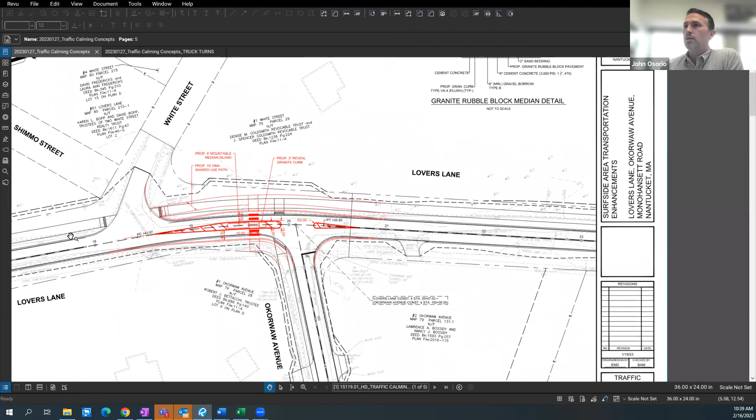The first location is the intersection of Lovers Lane and Okorwaw. What we're proposing here is 10-foot lanes with a raised, mountable median island. Lovers Lane runs left to right, north and south, with a side path on the west side. As you cross White Street approaching Okorwaw Ave, we're proposing a crossing across Lovers Lane connecting to the Okorwaw Ave side path on the south side of the road. We're proposing a raised median to slow down traffic at this location.

Part of the concern is also vehicle movements. We're anticipating that larger vehicles will need to make turns from Okorwaw Ave to Lovers Lane or back and forth as they travel to the airport. For that reason, we are proposing a mountable raised island.

At the moment we're showing a vertical curb with a 3-inch reveal, although we have different options for the type of curbing. In the past for a mountable island, we've used what you may see a lot on a roundabout, called a T100 curb - a slanted granite curb that can be used at this location as well.

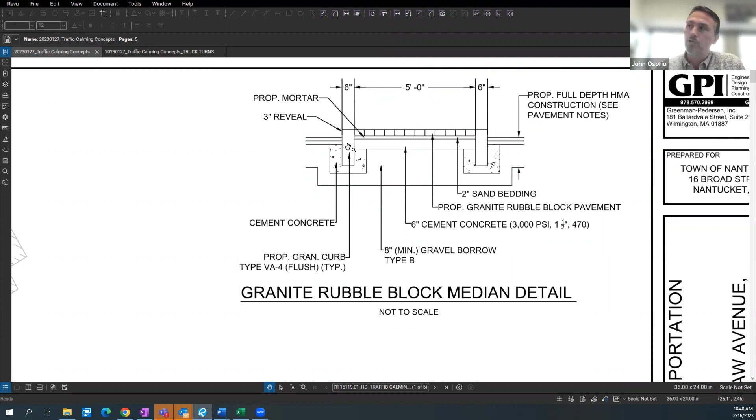What we're really trying to avoid is what we often see around islands used as flush curbing, but for traffic calming purposes we don't think that would be the best approach to slow vehicles down. So the purpose here is traffic calming while also accommodating vehicle turns. We're still evaluating whether that would be a vertical curb with a low reveal, two to three inches, or a slanted granite curb.

The surface of the median, we're proposing cobble, as we've seen in other areas around the island. We're talking Belgian block. We did this on Milestone Road at Monomoy and at Tom Nevers, however those are flush, and again for traffic calming purposes we feel it would be best to have something raised.

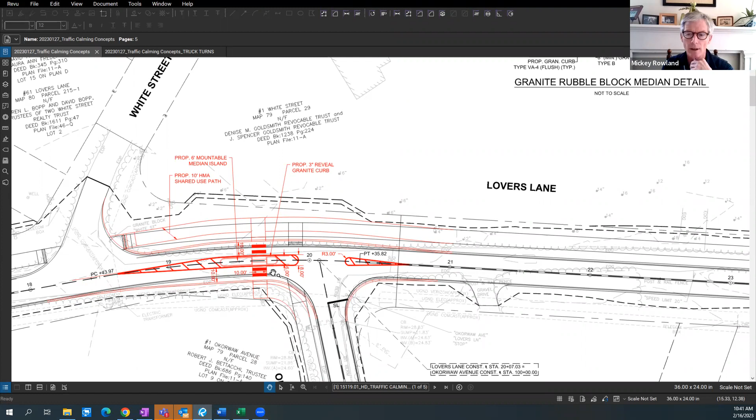Can I ask a question? You have a crosswalk going through the median - will the crosswalk be the Belgian block material? The median island will be Belgian block, but the crosswalk is just pavement, not Belgian block, for wheelchair ADA issues. Perfect, thank you.

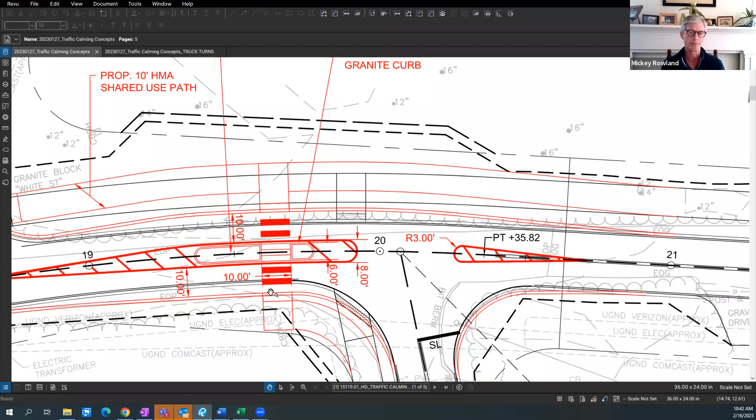Any other questions on this location? I guess I would just like to understand - there are speed concerns at a lot of locations. What is the driver of this? Are we sure this is needed? This seems like a fairly unusual arrangement for intersections on Nantucket, especially at a T intersection. So is it really needed is one question.

And the other is, if it is going to go forward, certainly the T100. I think if you go with a vertical curb there with the turning movements, you're going to end up with blowouts. I think you'd really have a problem with a vertical, sharp edge on that. But I'm still at the point of also, like I say, it's fairly unusual.

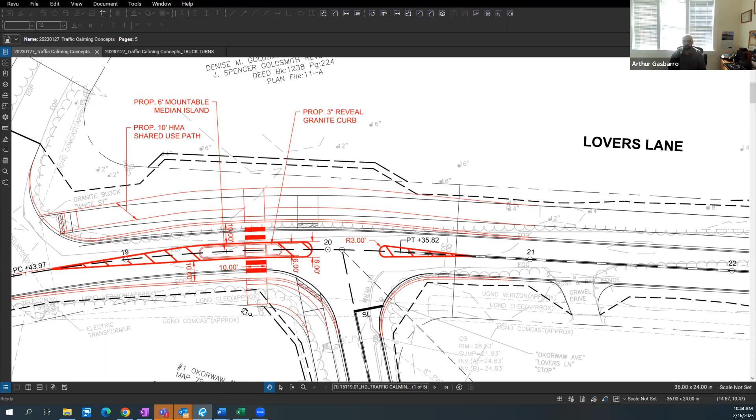Okay, well, keep going, and then I guess the question is, when you have that long of a stretch of a straight road, is this going to really, at the intersection, make a significant difference, and create a bit of an unusual layout and situation, but I'm not necessarily opposed. I just wanted to make sure I understand when we run through the rest of them.

Art: Yeah, I just want to make one note too, that I've been part of the group that's been reviewing these on a weekly basis. I had raised concerns about a straight curb, also with the super sharp curbing. So I've supplied GPI with the specs of the curbing that we're using for the Surfside sewer force main, which has a bit of a rounding edge on the curb, so it's not so sharp and causing blowouts.

We've also discussed that this is a route for house moves, and that island, while it's supposed to be slowing people down, will probably need to be mounted during house moves. I actually was the one who suggested the slanted curbing, similar to what we have in the triangles, like at the Sparks Ave roundabout. So we're looking at different things.

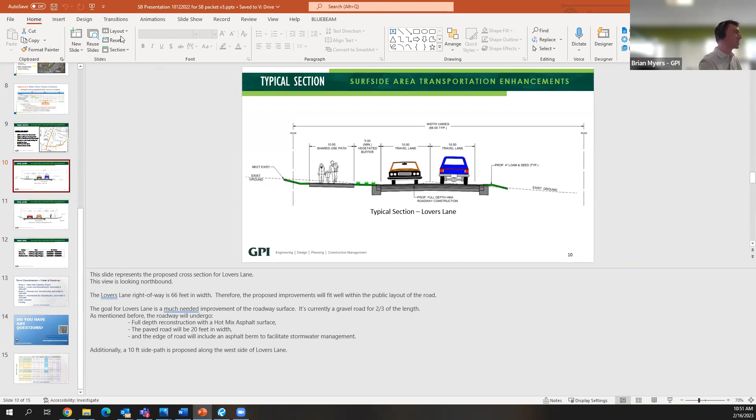What are you seeing, do you have any questions? Okay, looks like maybe we want to look at number 10. Yeah, so it's this one right here. Here, let me pull it up. Okay, so you have it in there, that's the one, go.

So I saw that on that, but you don't have it on your actual plans yet. We do. It's just that the plan I had displayed is really just the traffic calming plans. We don't have the whole setup, but we can certainly bring up the whole set and I'll do that. I just want to make sure, because I thought the discussion at the select board level wasn't quite clear. I felt like there were changes being made on the fly a little bit, and if this is what you're going to build, I'll stop there.

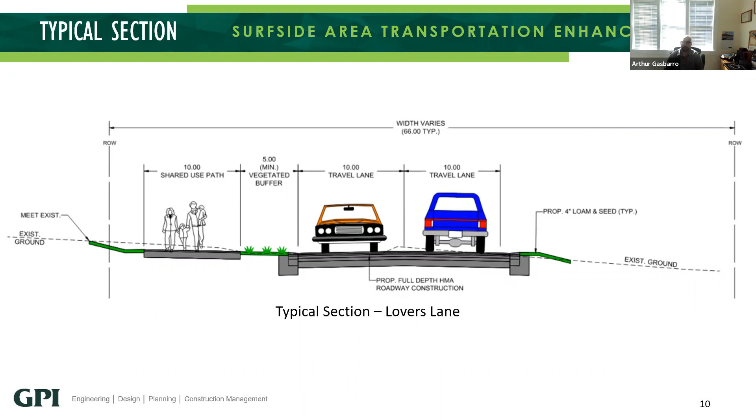I think we're on the same page. As long as that's in fact the case, a gutter to gutter 20-foot width, I think will be less than ideal from some respects, but balancing out other concerns, I can understand that. So, thank you. If you want to move on to the traffic calming, that would be great. Sure.

And if you want to see the full set of plans, we can certainly provide those to you. I'll look on the next set. That's fine, if you guys are working on it, we're good. Okay.

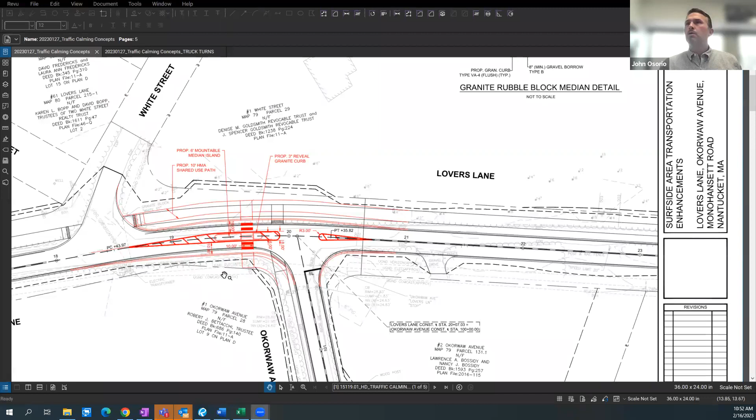All right, you should be seeing traffic calming back up. Yeah, we're still at Okorwaw. Okorwaw and Lovers, yeah. So we're switching over now to Lovers Lane at Rugged Road. What we're proposing at this location is really a raised intersection or a raised table, there's different terminology for it. I'm not sure if there's a location on the island for a full raised intersection. I believe you do have a raised crosswalk at one location I've seen on the island, or speed humps, which are completely different than this. Yeah, we have tables at the school. Okay.

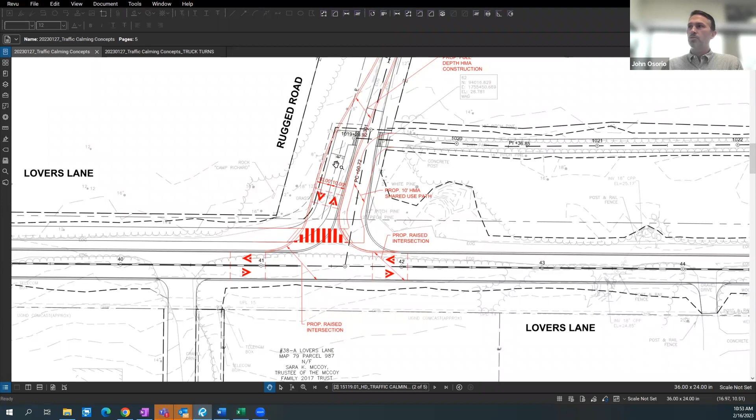So this is ramping up to about a 4 to 6 inch raised intersection. The whole intersection would be raised, including the crossing of the path along Lovers Lane. Once you get into Rugged Road, it dips right back down to existing grade, and then we tie back into a gravel road along Rugged Road. Rugged Road is a complete gravel road, it's a private road. It connects over to the Camp Richards driveway, and then I believe it continues further west.

I don't know that I'd call that a gravel road. That's what they call dirt roads. Dirt road, it's a dirt road. I know, but they call them gravel roads. It's fine.

Getting back to the plans, that was one form of traffic calming, pretty much at the center of Lover's Lane, cutting it in half there, between distances between Boulevard and Old South Road.

Is the surface going to remain asphalt, or will that change to a different paving material? The recommendation would be ideally to have a different material so that you can really see this, so that once the striping goes away, vehicles won't approach too fast. Ideally, we lock this in with a different material - that could be brick, Belgian block, locked in maybe with some flush granite. The ramp up is certainly asphalt, and then there is striping and signage associated with the raised intersection.

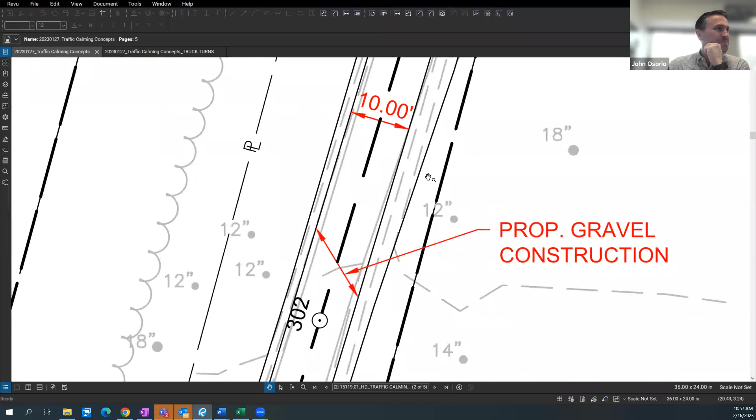I get that's probably beyond the scope of what you're doing, in terms of that rutted out section of Rugged Road - it's maybe 11 feet wide, or so, right? Right in close to there. Ten. And you can see from your contours that it's sunk in 2 feet, right? So it's not an area that vehicles can pull off to the side to let someone else pass and repass.

On that basis, going back to the Camp Richard entrance, one vehicle's got to pull over at the beginning and wait for the other to go. The way you're shifting this, I don't think that's going to work very well - people aren't going to see it, I think it's going to create issues, and there's an awful lot of traffic on that one section at certain times, right? I get that Rugged's not a heavily trafficked road, but the camp sees a lot of use, and there's drop off and pickup times for the scout meetings, with people coming and going at the same time.

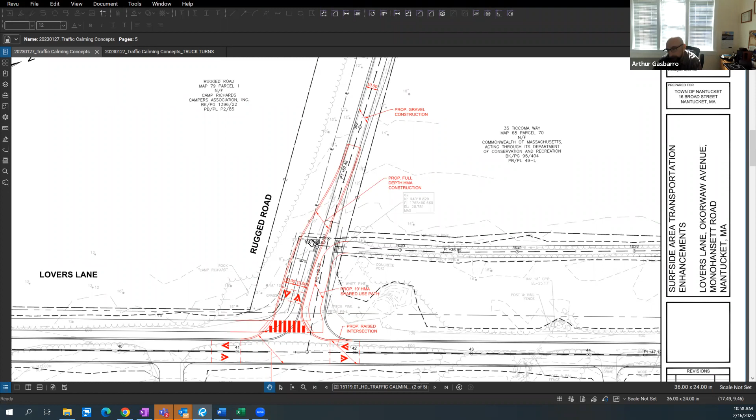I think that if you could find a way, given that you're already talking to the state forest for the easement for the path, to move the path over as well and have the easement come down along that line, you could straighten that intersection out, right? I think you'd have a much better design, and it would function better - the way you have this kind of angled right now, if you were to bring that in more at a 90-degree angle and shift the whole thing over, I think it would be safer and function much better.

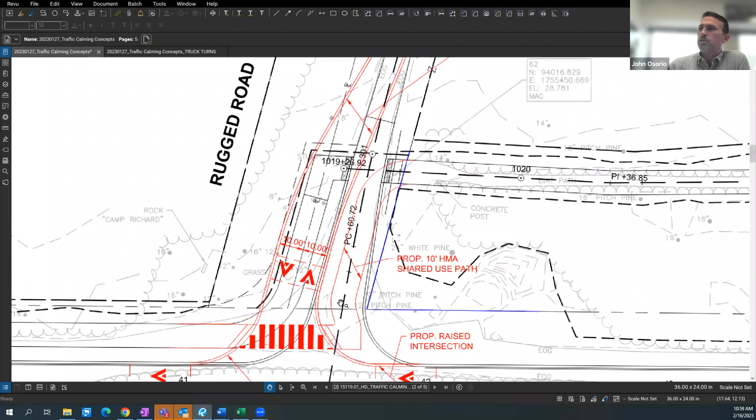Did you follow sort of what I was explaining? I think so - Rugged Road today is basically here, a straight line right here, along the baseline. And you're asking if we could follow that alignment a little bit better, or follow that alignment pretty much.

Right, I think it would work much better if you were to do that, and also where you increase your improvements to 20 feet wide, which I think is great and needed for that very reason. But if you were able to straighten that out a bit, so you had less of an acute angle at the intersection with Lover's Lane, and it was squared up better, I think people would be less likely to - it would slow them down.

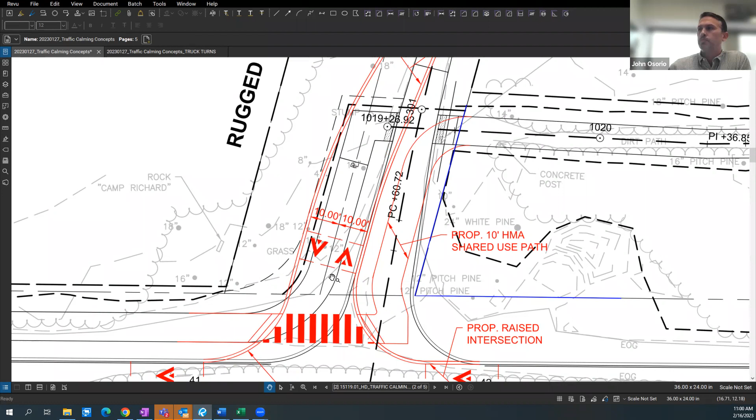So just a couple of things to note: we are a bit restricted. Right now the Rugged Road dirt road is basically hugging the right side of the layout, and it's a private layout. We have DCR to the north and Camp Richards to the south.

The struggle we were having is we need to fit the side path along Lover's Lane. At this intersection it takes a turn up Rugged Road and continues through the state forest. There's an existing dirt path through the state forest we're looking to improve as a paved path all the way through. So the side path will no longer continue along Lover's Lane, it will continue through the state forest. To accommodate that, we needed to pull this side path outside of DCR property.

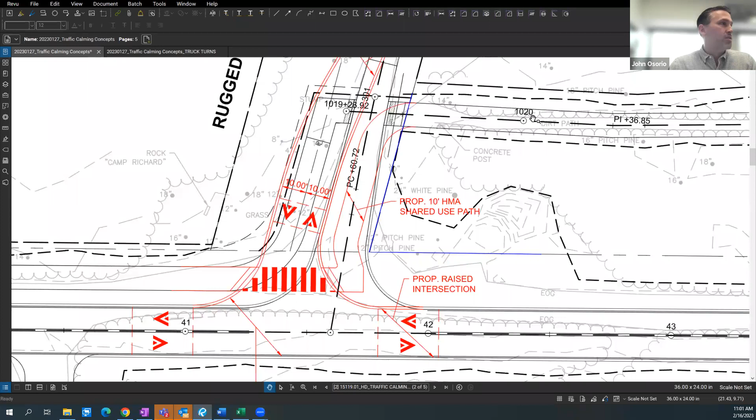We can't have any easements off of DCR property. It's an Article 97 protected resource, which they would not allow an easement for. Now what they are allowing, with a re-enhancement of an existing trail, is they've come to an agreement with the town on maintenance of that specific trail. So they wouldn't allow a new trail, but they would allow enhancement of an existing one. That's the reason why this is somewhat shifted, and then we have to tie back in.

Just to give you a little bit of an idea. No, I understand, you've answered my question. I can see the distinction. I'm familiar with the trail.

I was curious as to, on that same basis, if that shared use path along Rugged could run on to the DCR land, but I understand Article 97 restrictions and the distinction that's probably in play.

So I guess the other question would be to cross Rugged straight across and then put the crossing there off of the intersection. I could see where that's got its pros and cons, in terms of, probably from a safety perspective, it's better to have it at the intersection, but maybe not in this particular case. I guess we should just talk about that a little bit.

What if you were to have that crossing where the path is right now? It looks like that's how you maybe had it drafted before. Yeah, you see the dark red line is our original concept.

I'll backtrack a little bit here to give you more info on where we were. We actually didn't learn that Rugged Road was a private road till recently — I think Erica pointed that out to us. Thank you, Erica. And with the knowledge of that being a private road, potentially requiring more of an easement if we're going to push the path up Rugged Road...

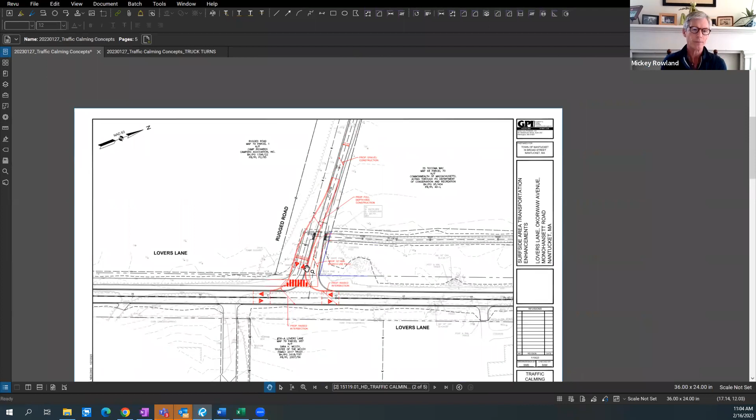With the two-way traffic that has to be accommodated up in there, versus if you flip-flop it back to how you had it. And who knows, maybe there's an aspect of this where the town considers a taking of just 80 feet, or maybe 100 feet, of the very end of that Rugged Road layout. It could probably be a friendly type of taking, abutting Camp Richards and DCR. I think for the scope of what we're proposing and the long-term improvements, it's better to get this intersection as ideal as possible.

Not because of a potential easement or maintenance issue for a very short stretch of road. That said, there was some recent agreement between Camp Richards and the town, and the only plan that they have seen is the dark line.

So our previous plan, I think you might be on that dark line plan, pull that bike path a little further to perhaps consider just a bit further to the south, and still straighten that intersection and give yourself the ability to bring that intersection more at a 90-degree angle, then switch back. Because right now, when you're angled like that, it's just going to make people tend to go a little faster around the corner in that one direction, sort of an on ramp.

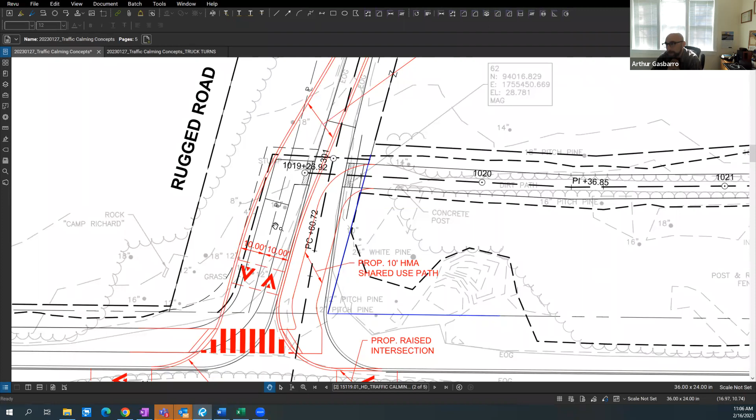Anyway, in terms of what you're showing us for the raised intersection concept, I'm fully supportive. Just want to open it up to the whole work group, but I think this intersection should be revisited in terms of alignment.

If I could just ask, your thoughts on this. Typically, what we would want to see is the crossing within the raised intersection. Why is that? Vehicles are going slower, they're already cautious because it's a raised intersection, so now they're slowing down for any pedestrians crossing.

If we move the crossing further west, we may want to rethink that and really concentrate on just the raised intersection right at the immediate intersection, and not so much at the bike crossing. Now that takes into effect, we have to factor in the safety of crossing 100 feet away from the intersection and how we handle that. Now, it's just a dirt road and there isn't a lot of traffic, so maybe there isn't that much of a concern, but I just want to point all that out so we think that through.

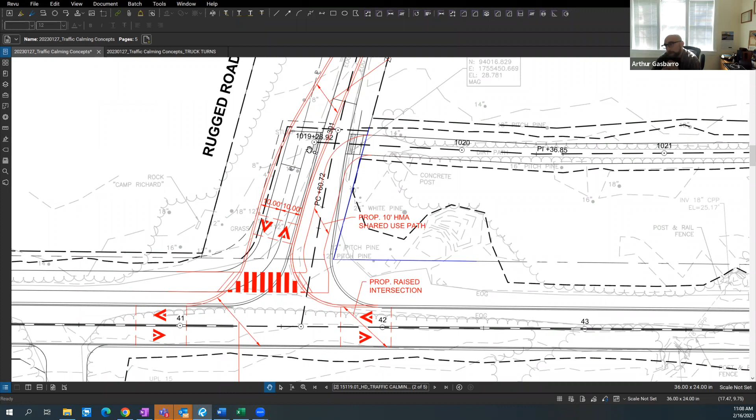I agree with you there. I think you would put the raised portions, limit that to the road, and make sure there's good sight lines and distances where that crossing is further back as the road narrows. That's your traffic calming and safety aspect at that location, because it's where you're going to start to throat down that road to meet the dirt road, gravel road, if you want.

And this crossing right now, as was shown previously, is really one lane. We would want to consider that. Yeah, I think you probably would be widening it out, but if you straighten that out, it's sort of right where it probably would be, throating down, reducing in width from your 2-lane to your 1-lane, which in of itself I think creates the narrowing, would likely create a safer point of crossing.

Yeah. So, thanks. Anybody else have anything they wanted to add on this? Okay, why don't we move on? So you want to see us revisit this crossing?

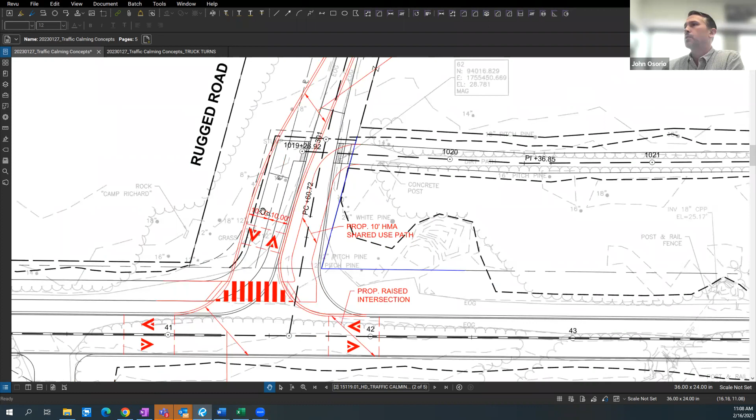Yeah, again, that's just my input as one. We're not, I don't know that we want to, unless you want us to take a vote. I take it that this is still, you said, 25% design, so I hope that there's room for adjustments based on our input. Obviously, we're just an advisory group to the town manager. I can't give you any direction in terms of that, because that's my suggestion. That's certainly not what you have to do.

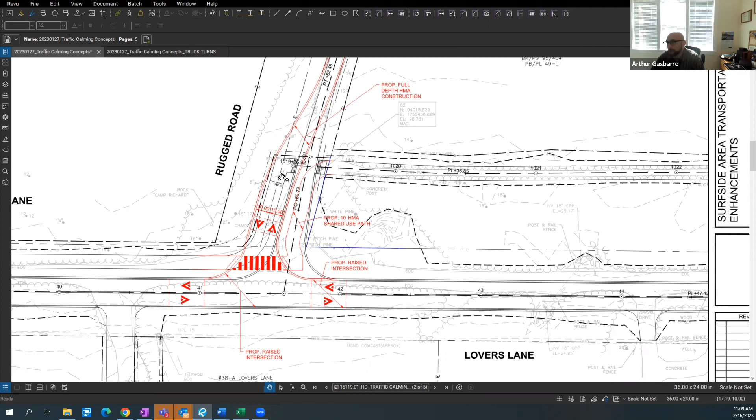I would just hope you took that under advisement. Those are sort of comments, I think, in terms of what you might end up with. I'm hoping to head off, obviously, a situation of post-construction where this isn't working as well as it could, and why did it get built that way.

Right, and just to give everybody where we are on the project, we are actually moving to final design, so at some point we will need direction on which way we move forward. We already have the two concepts, the original, but this is new. I don't think this is new. The red line is the new idea for this location versus the 25% design that's underneath.

Yeah, so looking at this a little more carefully, the advantage that I see to this design, and I hadn't thought of it earlier, is that people coming down the bike path from the right side of your screen, the north, might just tend to fly across the rugged road intersection without stopping.

Whereas the new design forces them to take the curve exactly and then cross, it's kind of a zigzag. I agreed with Art earlier, and I liked the intersection as you drew it in black, but I see a bit of a safety concern for bikers not flying through across that street, forcing the curve. So there's two ways of looking at it.

That was a bit of our concern as well, Mickey. Coming from the south, they are crossing at a raised location, so vehicles are a little more cautious there and have slowed down, and we're only talking about Rugged Road. But still, that's a concern all over the island, right? There are concerns about folks crossing these intersecting roads.

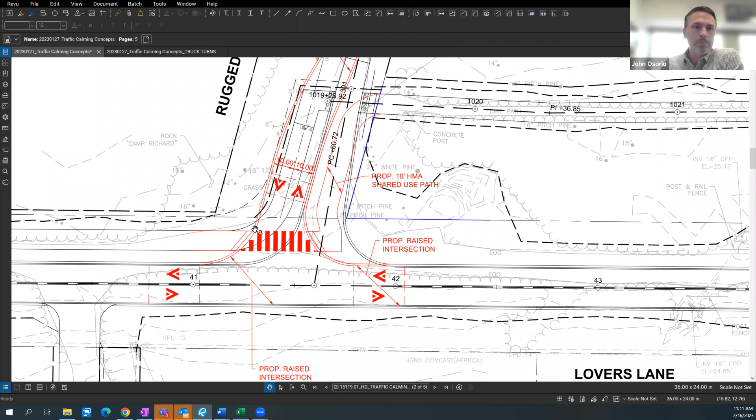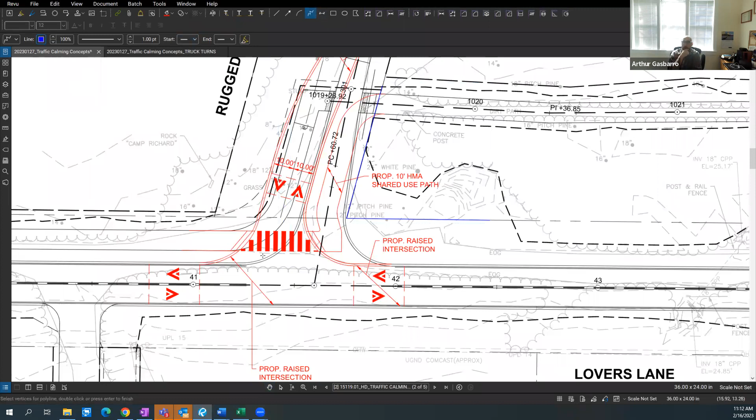I guess I'd offer, if you're going to stay with this layout, I still think it probably should change, but if you are going to stick with it, I'd suggest trying a bit of a rotation for the first 80 feet or so, so it's more like that. Then maybe you lengthen the improvements a bit further into Rugged to create an S-turn to connect back into what's there. If you decrease that acute angle, it's going to be something more like that, and maybe it has to carry on a little further.

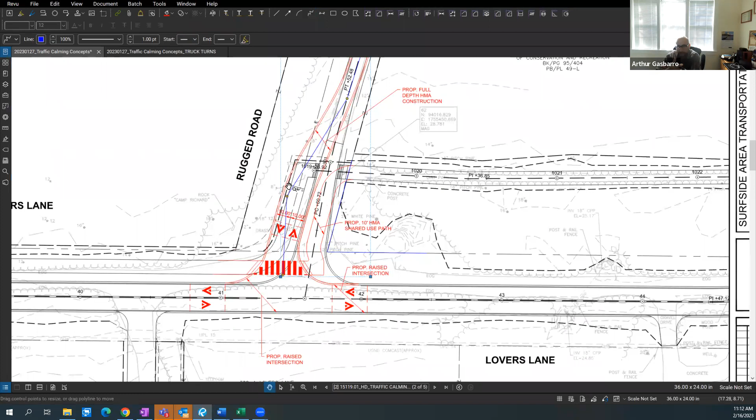You might want to carry that 90 degree to where the crossing is going to happen. My recommendation would be what we've already discussed, but if you're going to stick to this, I think it might be better to look at that a little closer. Okay, any other thoughts?

Okay, why don't we move on to the next one? Next location is right before Nancy Ann. Again, we've heard concerns about speeding, and we've also heard that between Rugged Road and Old South Road we weren't originally providing anything for traffic calming. So we identified the intersection, or the vicinity of Nancy Ann Lane, as a potential location.

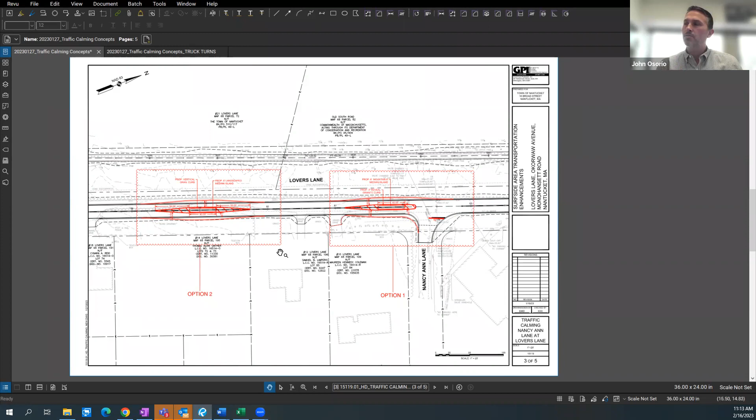We provided two options here. One is very similar to Lover's Lane at Okorwaw - a raised mountable median. The difference is there's no crosswalk in between. Again, the purpose is slowing vehicles down as they're entering a more neighborhood setting. We need to make it mountable in case there are heavy vehicles, larger vehicles taking the left. But the other option, to avoid that odd layout you mentioned for Okorwaw, is to just shift it further down.

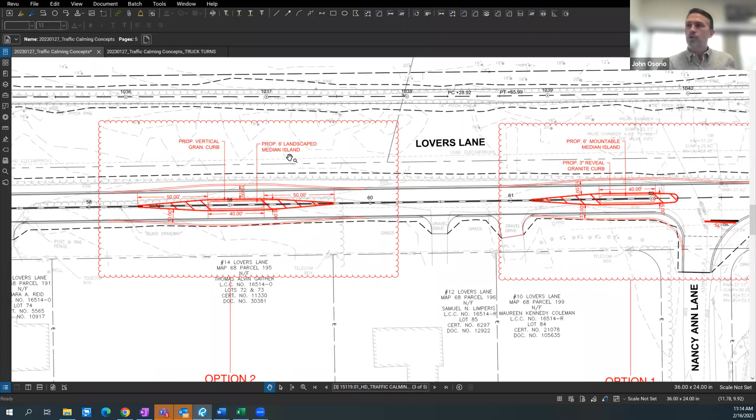We're not too concerned about this. It would be a full raised 6-inch reveal vertical curb. It could be a grass median - it doesn't need to be Belgian block. Or plantings, doesn't have to be grass either. Again, the purpose is having a vertical element in the middle of the road, slowing vehicles down as they're entering the neighborhood, between Rugged Road and Nancy Ann or Old South Road.

The two options at this location - one, we have to consider vehicles mounting, and we'd probably use the same curb material, maybe the T100, which I believe is a 3 or 4 inch reveal but a sloped curb. I guess from a consultant's perspective, would you recommend option 1 or 2?

Well, for ease of not dealing with having to mount it, we would go with option 2. It would create a bit of a gateway into a neighborhood - this is all commercial, industrial over here, and then once you get past Nancy Ann it's residential and state forest. I can see that.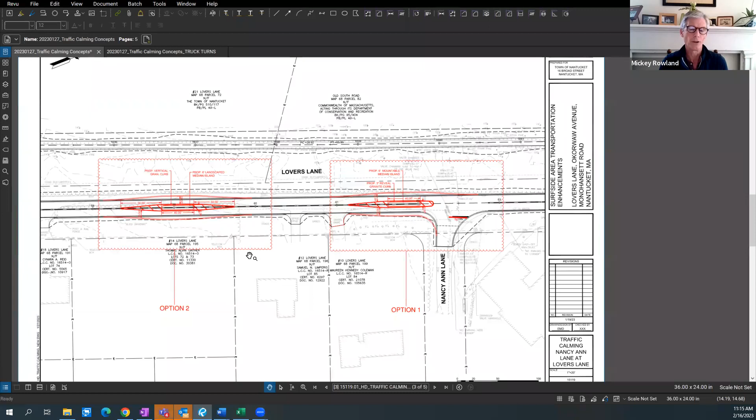Anybody else have thoughts? Option 2 has a vertical curb edge to it - we can go 4 to 6 inch, and it could be landscaped. The curb concerns me a little, if it could be more rounded rather than a sharp edged curb. We can go with a sloped edging curb, which is what Erika had recommended.

You see that on the Sparks Ave split islands, the outside of the roundabout. That would be my recommendation as well. I think the vertical in the middle of the road is trouble. Me too.

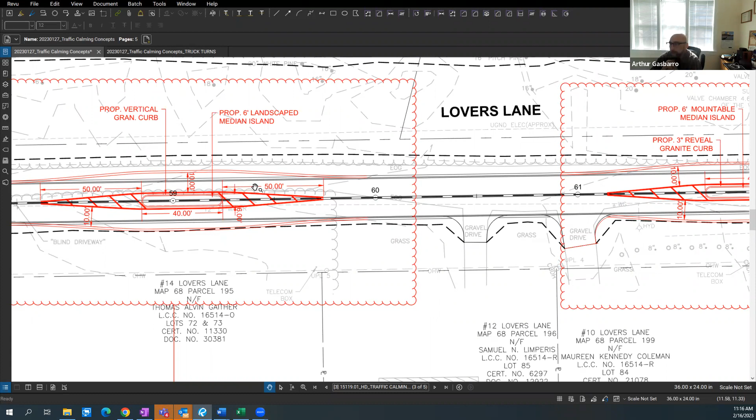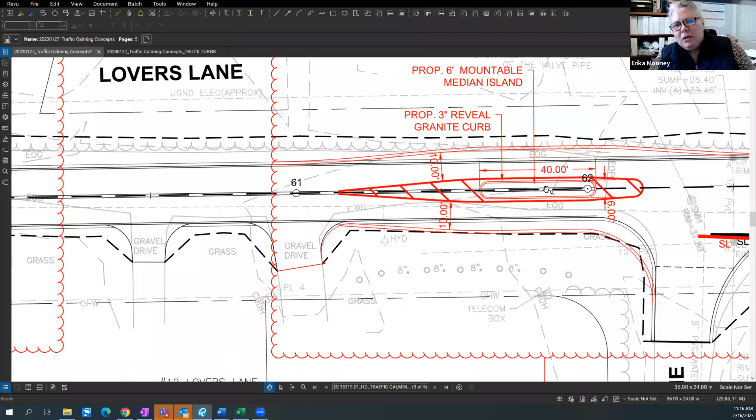But I guess I would lean towards option 2 based on the good point you made. I think it could be a nice feature. You could still plant taller trees, anything that doesn't block visibility. With option 1 we wouldn't be able to plant because the intent would be mountable, and you'd be potentially creating more noise as people need to mount that.

I'm just thinking about landscaping trailers that might come out of Nancy Ann Lane to turn left. I keep thinking, build it and they will come. Right now this road doesn't get a huge amount of use because of the state it's in, but once it's a beautiful new paved roadway, especially a straightaway, I think it's going to have more traffic. This is right at Nancy Ann, looking south, left, east. That is the Richmond residential area, and I would be worried about the constant noise of trailers mounting that curb.

Creating a ruckus. It seems like the consensus would be option 2 with the sloped curb. And as far as landscaping, you really can't put trees in there if that's going to be a route for house moves, right? It's too narrow a thing for trees.

One thing I wanted to point out: when Richmond put in the medians on Old South Road, they had planting plans with trees and things like that, which is great. I had seen this thing where in Europe, in the medians, they plant areas for bees, something kind of wild that doesn't need water or mowing a lot. Maybe we think about something like that here. The other issue with trees is you have to be careful on the species with respect to the roots damaging your brand new infrastructure and road in 5 or 8 years. But probably we could leave that to, I think, a layout issue.

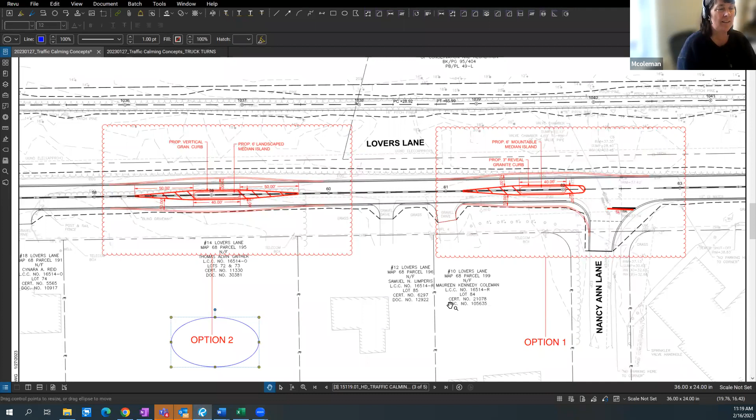It's Maureen Coleman, and I live at the corner of Nancy Ann and Lovers Lane. I can attest to the volume of traffic making that left off of Nancy Ann from a number of landscaping companies behind me. I want to reiterate that the noise level would be more helpful if we're down to option 2, because that is a vacant lot. From this drawing, it would be a difficult left turn from those trucks, whether it be Cape Cod Express or landscapers. There are a number of other businesses back on Greglen that make the left turn down Lovers Lane off of Nancy Ann.

Thank you, Ms. Coleman. I think we're all in agreement. Great, okay, thank you, thank you. Anybody else have anything further? Okay. Was there anything further on this project?

There's two more locations, I'll try to go quickly. I know you have a longer meeting, but let me show you. Monohansett is another location we were looking at, where we've heard speeding is an issue, particularly around this curve. I assume it's coming from the north, although it could be both sides, but this is a short segment between Okorwaw and the curve. Erika, you may know best what the problem is here.

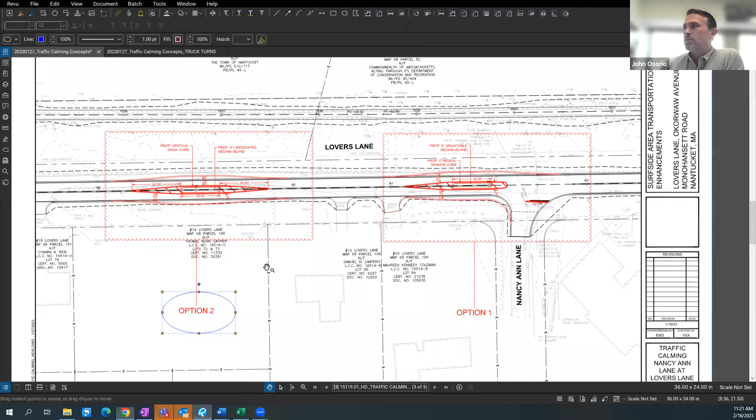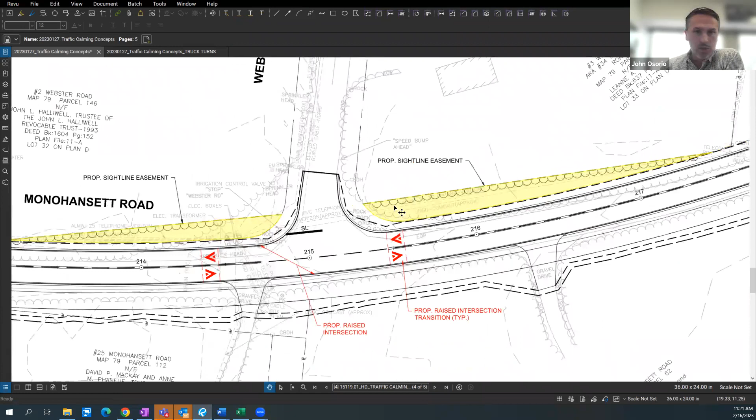To address that, this is the intersection of Webster Road and Monohansett Road. One option is a raised intersection at this location, though I'm not sure it's completely necessary. But even more important would be sightline easements we're working on, to clear some of this vegetation and have easement rights to continue clearing it, so folks coming out of Webster have appropriate sight distance at the intersection.

But again, in trying to slow vehicles down as they're crossing Webster and approaching the curve along Monohansett, we have the option of a raised intersection here, or a vertical element, which would be a raised landscaped island as we're approaching the curve on the north side.

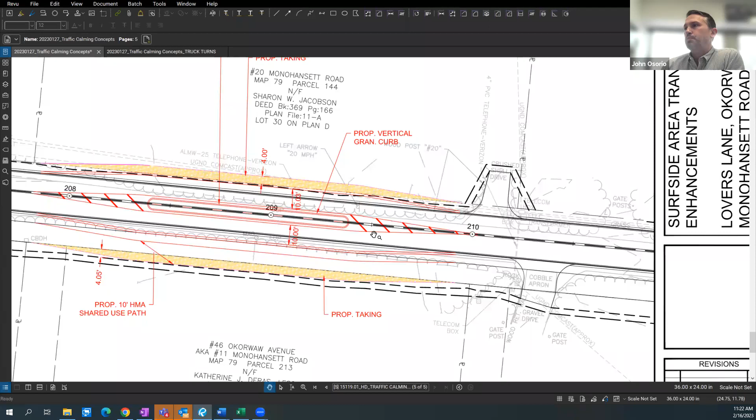The concern here, or what else would be needed to accommodate this, is that there would be easements required from the abutting properties. So the options are: either a raised intersection or raised median that requires easements, or a raised intersection at Webster, with sightline easements highly recommended, as there is very poor visibility coming out of Webster.

Okay, thank you. I'll jump on this one and then open it up. Sightline easements, without a doubt, whatever it's gonna take to get those in place, I think are desperately needed. I don't think you need a raised intersection there personally. I think the sight lines are really the issue there.

Work group members, any further thoughts or agreement on that? I guess maybe related to this is looking back at the Okorwaw intersection where you've got the curb islands. Was there a consideration for just doing a raised section back at Okorwaw rather than the curb islands? I was gonna go to that one next, Nikki. Well, I'm talking about the first intersection, Okorwaw and Lovers. Oh yeah, going back to that, we can certainly revisit a raised intersection at that location.

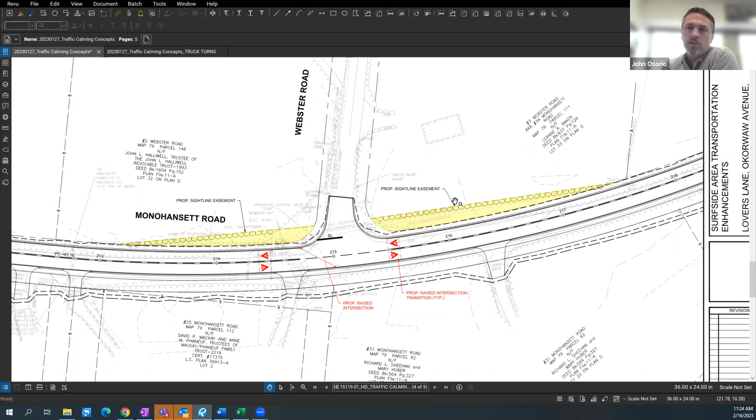We had come up with various options, working with the transportation planner at the time, for different locations, but we can certainly go back to a raised intersection at that first location. It just seems a lot simpler, and I don't know if it's as effective at traffic calming, but if it helps, then maybe. Versus the amount of that other, I would agree with that.

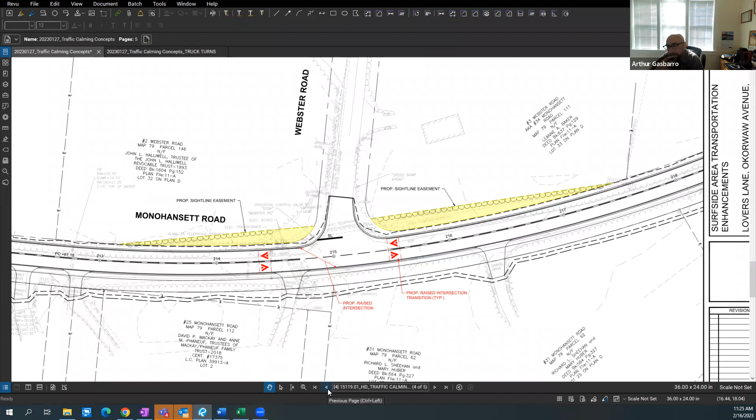So are we in agreement? We probably don't need a raised intersection here. I don't see the need for it there personally. Yeah, we would be in agreement with you as well. We were trying to come up with some type of solution for the speeding around the curve.

Now here, I think the island - I understand there's a bit of speeding, but I also wonder if, hopefully the bike path is going to open with a multi-use path, shared use path - terminology seems to always be in flux here - but that's going to open up the sight distances quite a bit coming around that curve.

I'm not opposed to this, but I think it's a little odd. I understand there's only so many options. Not opposed personally, but having to get easements and change things here - without doing something, this is a bit drastic because you need easements. Plus, you don't typically see a median just popping out of nowhere. That's where I'm coming from - you come around a corner and then there's something like this.

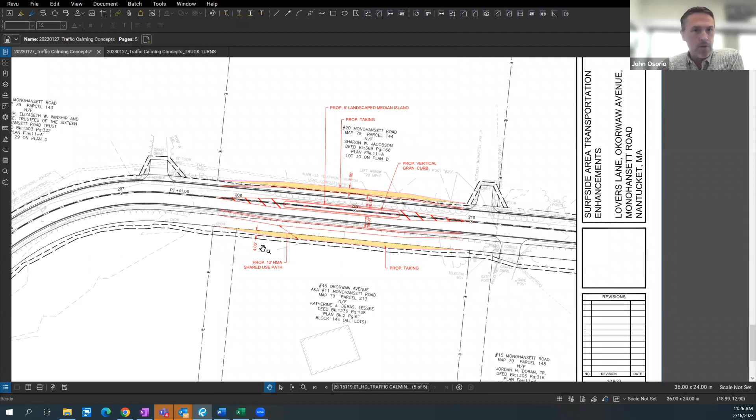I don't know that I would particularly support this. But other than that, the only tools we have are signage, which we tend to get a lot of pushback on with the island as well. And certainly protecting this corner a bit more with maybe some timber rail and some reflectors, something to visually see it at night. I think this is a good location for additional signage, and we are sensitive to it, but for a corner like this, that would be the way to go personally.

Anyone else? I would think that just the curve itself - I don't travel that road very often - but doesn't the traffic slow down just because of the curve anyway? Or is it... I travel it a lot and people, part of it is...

I think there is a speed factor there that happens, but I don't know that just plopping an island right next to the curve is the best real solution. I think once this whole thing gets fixed up, it's just going to have to be better patrolled, honestly.

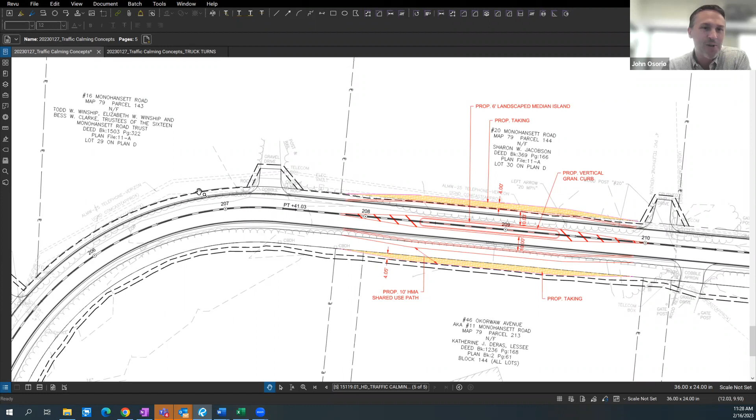We had suggested - again, I don't think we've done this anywhere on the island - electronic signage that tells you how fast you're going. No, I don't want to get tarred and feathered, but figured I'd throw it out there. We've looked at all these options and are trying to accommodate whatever we can at this point.

So that's all the locations. Sounds like we're going to go back to revisiting a raised intersection at Okorwaw and Lovers. Once those are ready, we can share that with the group, and we'll update everything based on what we've agreed to here and get approval or concurrence on how everyone would like to move forward.

Okay, sounds good. Erica? Thank you. Yeah, thank you, John. And thank you, Brian and Emily too, for coming on and reviewing these with all of us. Much appreciated, all your efforts.

This project, I've been a supporter of this for a lot of years and I'm really excited. I think at one point I actually spoke at a select board meeting and said something along the lines of, I can't imagine being in the back of an ambulance on that road. So that's how much - I do travel it fairly regularly and this is a long time coming. So thank you. We've been on this for a while and are excited to see it carry through the final design, and fingers crossed that it gets funded and we can keep this thing moving.

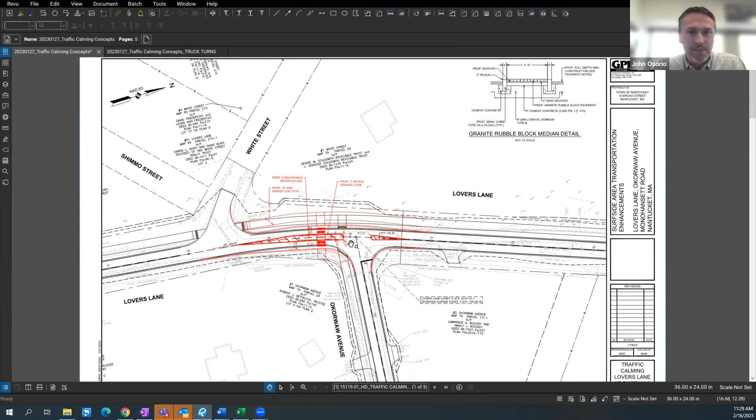Okay, thanks again. Thank you. All right, with that we're going to move on to item number 2, which is to address pedestrian safety concerns at Miacomet Ave and Surfside.

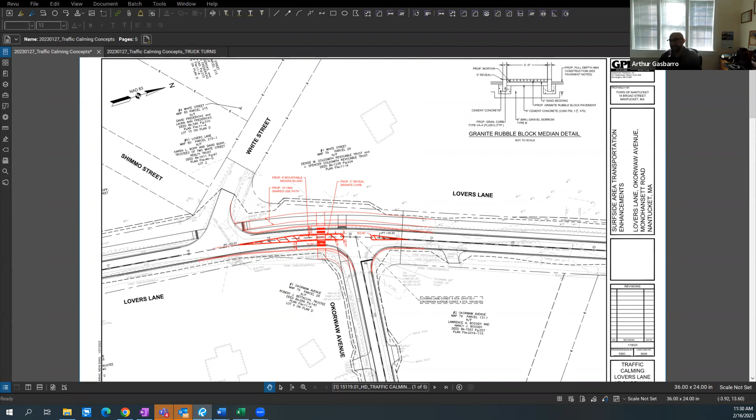Ms. Browse, I see that you've been waiting patiently for this. I wasn't sure that we were going to keep this on. We have lost our traffic - our transportation planner. So I don't think anything has really come out for final changes that maybe we could implement here.

You're certainly welcome to speak. I appreciate it. I'm sorry we took so much of your time to get to that, but I honestly don't know what we really have and how we would implement something like this without a transportation planner to help us usher it through. I defer to anything you want to add, and maybe Ms. Mooney might have something to add. No, I don't - you said what I was thinking.

What happened with the plans that he presented at that last meeting? Are those feasible at all? Yeah, I think they had some real merit, but they were going to have to get taken to further design, as well as working probably through NPDC - they're going to need some engineering, some funding, and someone to really drive that forward. Hopefully we can get that position filled, the town can get that position filled, and maybe we can.

I certainly agree with and appreciate everything you brought forward. I want to see it happen. I just don't know there's a way forward for implementation with the current staffing situation.

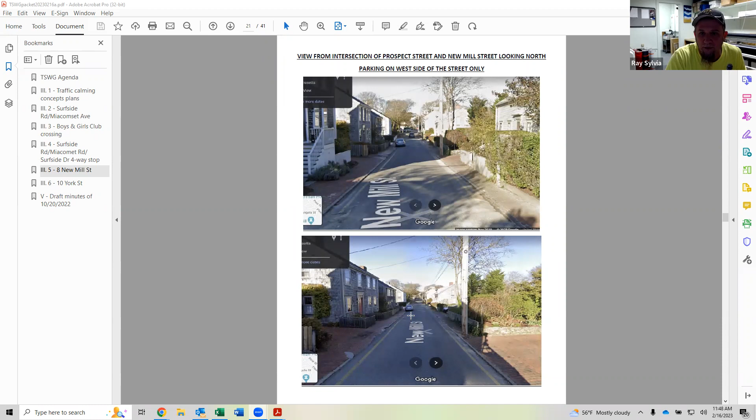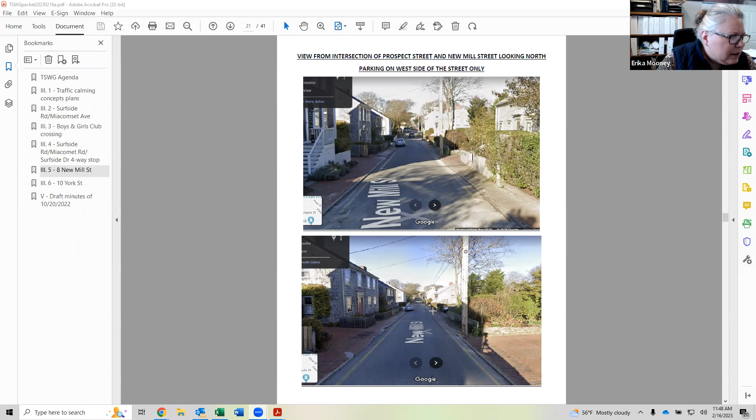It's up a little further, I believe. So here's, I think, the parking, here's the telephone pole, yellow line. Yeah, that's the one further back. I think it's the one up there by that telephone pole. I don't know, yeah. Okay, so they're asking right here.

Yeah, and you can see where that yellow line is on the left, where it ends, it actually ends right where their driveway starts. The next yellow line down, heading north, it's 36 feet between yellow lines, so you usually have a 20-foot spot for a vehicle. So you would still retain a full spot if you extended it past it, up to the end of their driveway. I think they're having a problem getting out when they're pulling out. If they were backing out, they're all set, the yellow line's fine, but I think they're pulling out, there's been a vehicle backed in there.

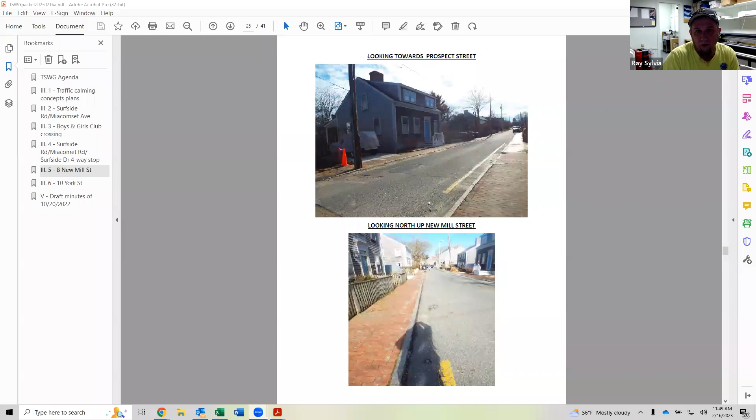Yeah, every time we've been by there, there's a vehicle backed in there. I think they just redid their driveway, still in the same spot, but redid it. I can see how they'd have a problem pulling straight out if they backed in, especially with a utility vehicle across, which I think she said in her email. So we could extend it to the end of her driveway. It might not even have to be a full 16 feet, but that's what I measured, to the other end of their driveway is 16 feet. And you'd still have a 20-foot spot between there and the next line.

Okay, you wouldn't be losing a full spot, but 16 feet is 4 feet short of a full spot. Is there such a motion?

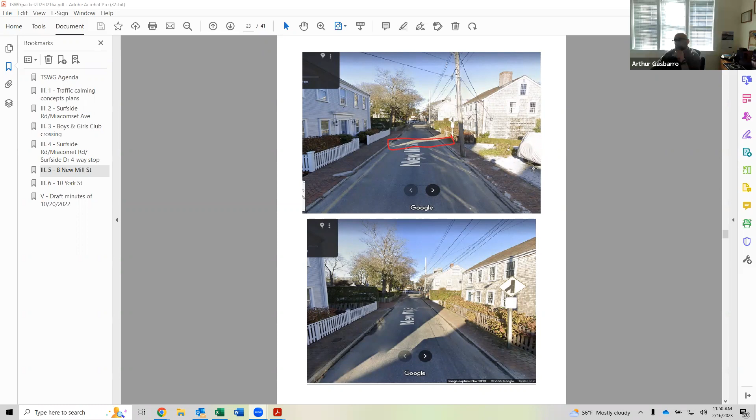Wouldn't mind hearing from the representative what the real motivation here is. I guess it's pretty clear, but I'm not clear on the details. If it could wait, I wouldn't mind.

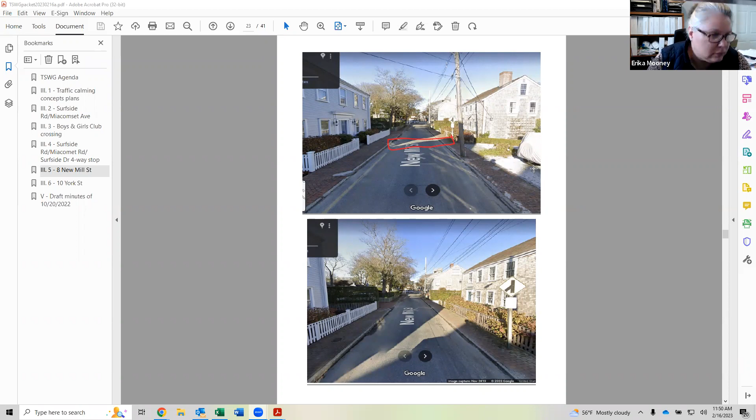You want to reach back out to them? Yeah, I just texted Linda, but I haven't gotten a response. Okay, well, we'll hold it to the next meeting then. And then we have item 6, which I think we have to hold because I have to recuse myself and we wouldn't have a quorum.

And with that, any other business topics not reasonably anticipated 48 hours?

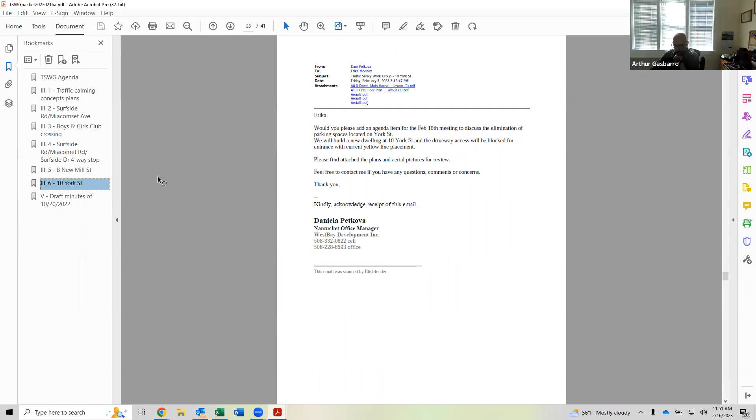8 New Mill, so if you could explain to us, please, Mr. Sherman, why you feel this is needed.

Sure, no problem. The driveway that you have circled there to the right, that's where we pull out of the driveway, that's our main driveway. And the car you see circled as well, when it's there, we can't pull out of the driveway with the telephone pole and the car there. We're actually blocked in. So there was a yellow line that goes and then stops and then continues on, and we just wanted that line continued through so that car couldn't park there.

We've talked to the person about not parking there. I think it's someone who lives on that street and for some reason just always parks there every year. We've looked at Google Maps for years and years, and it's always been parked there for whatever reason, so it's not like it's a local person. We'd just like to be able to not have someone park right behind the driveway so we can pull the car out.

Okay. Anybody on work group, any comments? Mr. Gasbarro, does that address your concerns? Yeah, it does, it kind of clarifies a little bit, and if it's that difficult and Ray says we'll still have one parking space left, I don't have a real problem with this.

All right, so is there a motion to extend the yellow line approximately 16 feet to facilitate access to the driveway at 8 New Mill? So moved. Is there a second? Second. All right, moved and seconded. Mr. Gasbarro, how do you vote? Aye. Sylvia? Aye. And chair votes aye.

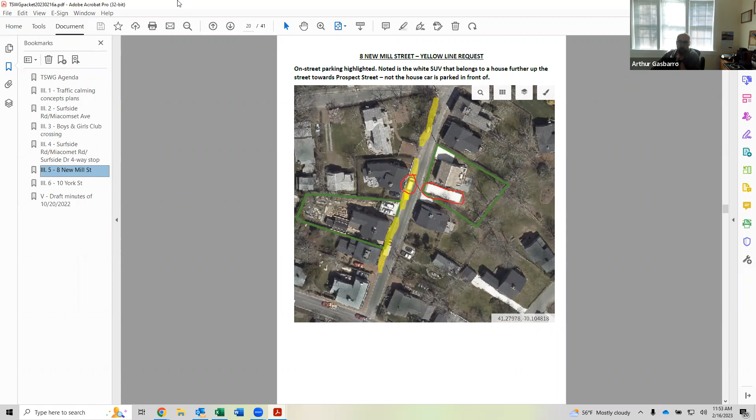Anybody have any questions or concerns on those minutes? Hearing none, we'll consider those adopted by unanimous consent. And is there a motion to adjourn?